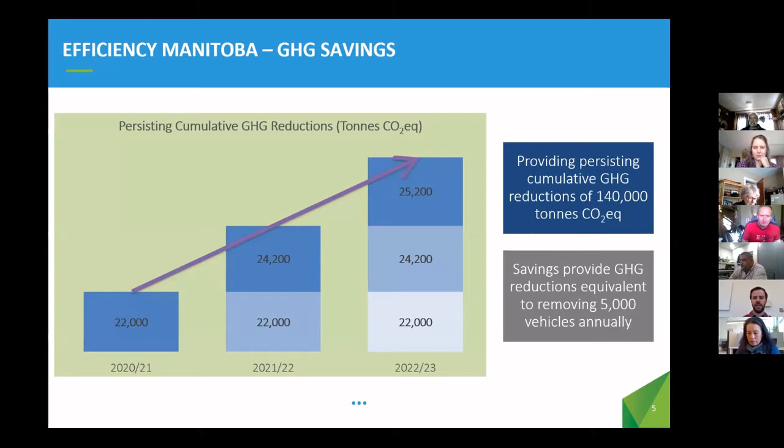Now, we don't have a mandate for electrification or GHG reductions, but as a result of our programs reducing electric consumption and, more significantly, natural gas consumption, we are achieving GHG reductions every year that we operate. You can see those are piling up over the years and are certainly significant.

So now to the project where I was asked to go through, the natural gas challenge, or as I'm calling it, not as flashy a name, but meeting peak electricity demand in winter. The reason I say that is because our natural gas consumption in Manitoba is primarily for water heating, but also, more importantly, space heating.

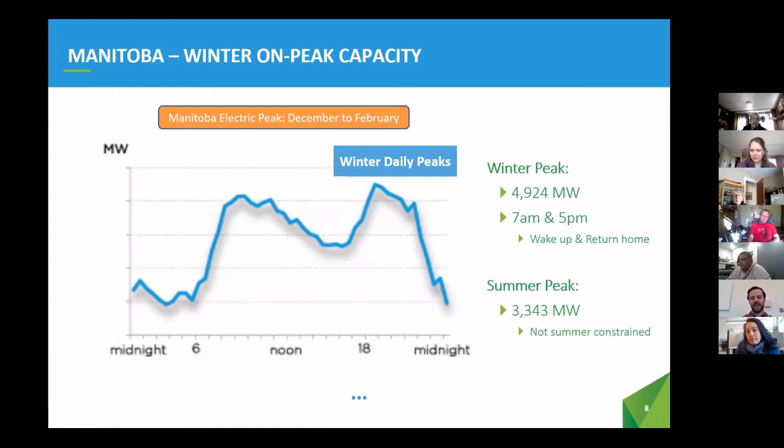Even as it is right now, our peak energy usage in Manitoba happens in the months of December to February, typically on the coldest days of the year. That peak, you can see throughout the day, energy usage adjusts, and it's particularly high in the morning when everybody wakes up, turns on their coffee maker, all the lights, and turns up the thermostat. Then it dips down a bit throughout the day as people hopefully turn off their lights when they leave home and maybe turn down the thermostat. Then it peaks back up when everybody returns home, turns on the lights, starts cooking, and businesses are also still operating around that time. So you see those double peaks that we have.

Of the last 4 record peaks, I believe 3 were at 5 p.m. and 1 was at 7 a.m. So those are the points we need to keep mindful of, because if you're going to reduce or eliminate natural gas usage, which is for heating, those peaks are going to be that much higher.

Just to give an idea, if Manitoba were to fully decarbonize on this front, we're looking at natural gas loads being equivalent to about all of our current electric capacity. So there have been reports out there that said we need to double our electrical capacity in Manitoba.

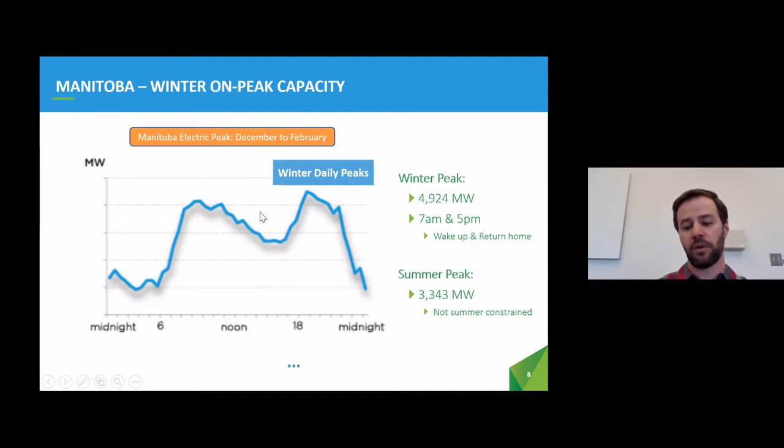Another option is to shift that electric peak usage. As I indicated, if we could shift these peak usages at the morning and evening off to later times, then that would reduce the amount of capacity gains that we would need.

The last option I want to talk about is reducing energy consumption in general, and this is what Efficiency Manitoba does. Now, what option would we need to do? Well, all of these. It's just a variety of the energy mix that we're going to need to achieve this.

Keep in mind that because those are intermittent technologies, you would actually have to add energy storage on top of that, and we need systems that can achieve that peak winter savings. So then you've got hydroelectricity, and obviously there's natural gas combined cycle, but that kind of defeats the purpose here. If we're trying to work towards a road to decarbonization, then adding a natural gas load isn't going to help that.

Now, one that's not on here is actually energy efficiency. Energy efficiency is the least expensive form of new energy. Essentially, it's kind of that concept of a dollar saved, a dollar earned. So if we can reduce our electric usage on that peak, then that's electricity that could be used elsewhere.

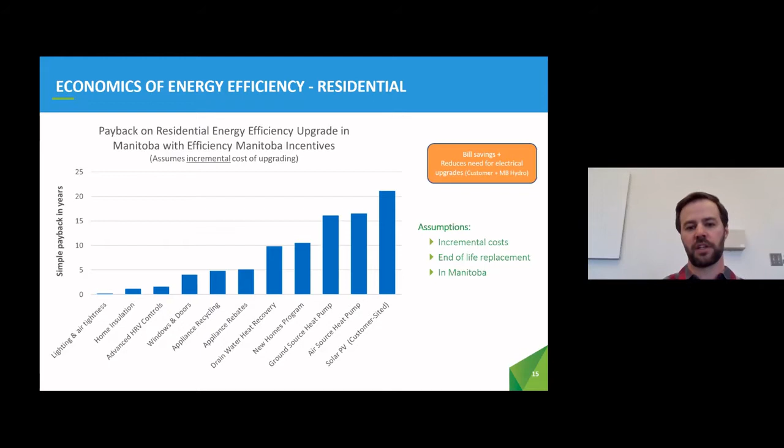Now, these simple payback calculations are based on incremental costs. So I'm not talking about ripping off the siding of a perfectly good building that's 5 years old and upgrading that insulation. It's the point of time when a customer is deciding to upgrade something in their facility - the windows, doors, insulation - and they decide to go with a more energy efficient option. It's the incremental cost, and we have incentives that reduce that incremental cost. That's how you're achieving these phenomenal paybacks in these residential and commercial programs.

And again, you can see here the building envelope is the most cost-effective means as well on the commercial side of things. So I'll get into a couple programs, and I know I'm going to go a little bit quickly on some of these things.

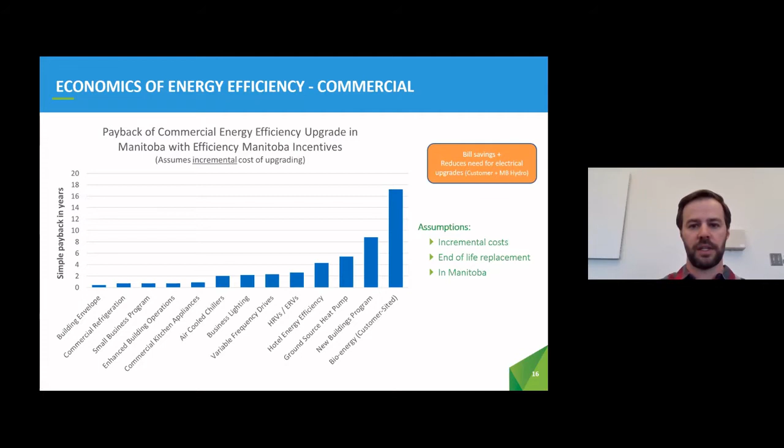Some of these measures could certainly have an hour on each topic, so by all means, you'll have time for questions at the end. But here's one of the ones that certainly has phenomenal paybacks and will give us on-peak energy savings in the winter: lighting, because lighting is going to be operating during those peaks.

And so here we can see, in an actual project example, we had a customer that eliminated their metal halide fixtures and replaced them with LED fixtures. And they actually achieved a payback of 3.3 years.

And the benefits of LEDs, being longer product life and less maintenance and so many more options and flexibility of lighting. With previous forms of lighting, you got the color temperature that you got. Whereas with LED lighting, you can go from warm light to blue light. I've even seen those little party lights that can actually alter and change the light. So there's so much more flexibility in those, and great energy savings.

One of the forms of energy reduction that we really need to talk about, if we're going to make significant inroads in reducing our heating loads and reducing that winter peak usage, is the building envelope. In this example on the right, which I've crossed out, you can see thermal bridging, where the traditional way of insulating buildings was putting insulation in between the studs. So here you can see in this house that there is thermal bridging through the stud, and it's actually warming up the exterior of the house. You see those offsets where the studs are. Now, that's even more significant if you're looking at metal studs, which transfer even more heat.

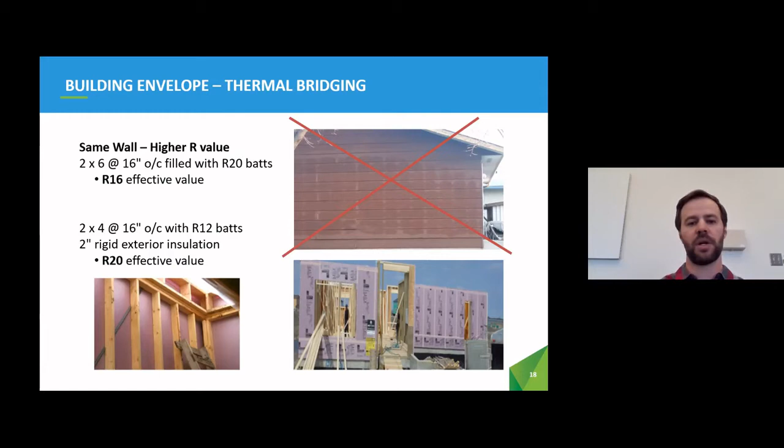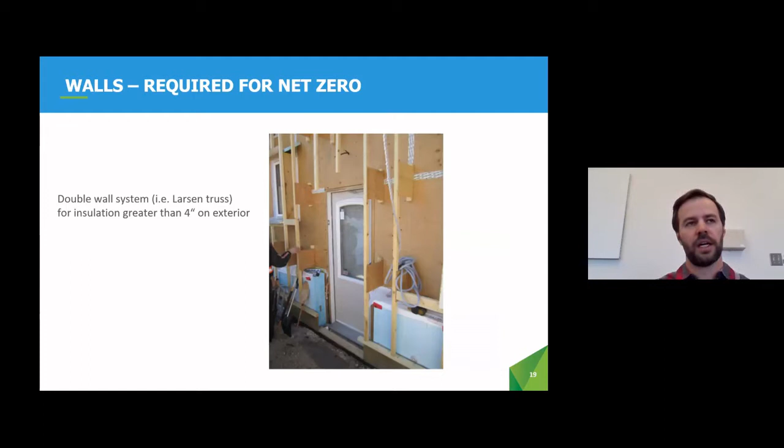Now, if you wanted to go even further, and we're getting into requirements for net zero, if that's the way the legislation is going, then we'll have to go into these double wall systems with Larsen truss, so you have enough room for 4 inches of insulation on the exterior, a very solid break of insulation. And obviously, you're going to need high performance windows as well, and the like.

If you have a standard home that had 4.5 air changes an hour, and you reduce that with just a bit of work to 3.5, which wouldn't be hard to achieve, then it's essentially the equivalent of upgrading your wall insulation from R12 to R18, or increasing your attic insulation from R20 to R60. And you can do these kinds of things with, say, $1,000 or less of work on improving the air sealing around your windows and doors. So it's not insignificant, and the return is huge.

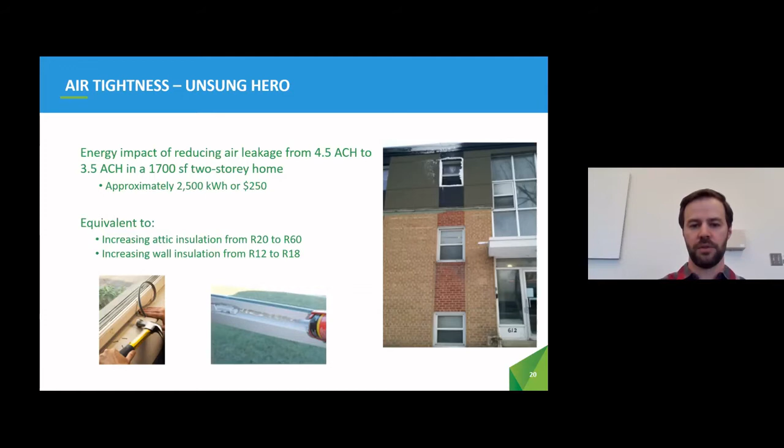Now, getting into the actual heating systems, first I would say the focus should be on reducing the need for the heating system. That should be your primary objective. But once you've reduced your internal heating loads and upgraded your building envelope, then we can look into ground source heat pumps. The reason ground source heat pumps are more efficient than other heating systems is because they're just moving heat versus creating it. The ground in Manitoba is about 5 or 6 degrees. What a ground source heat pump does is, through a ground loop and compression and expansion cycles, amplify that heat and bring it into the building.

And from there, you can achieve a 60% reduction in energy use, or turn 1 kilowatt hour of pumping capacity into 2.5 kilowatt hours of heat. And this will actually achieve on-peak winter savings. So now we're reducing that peak load on our system so we can use that somewhere else, and we don't have to add new costly forms of generation. And Efficiency Manitoba already has commercial incentives available for ground source heat pumps.

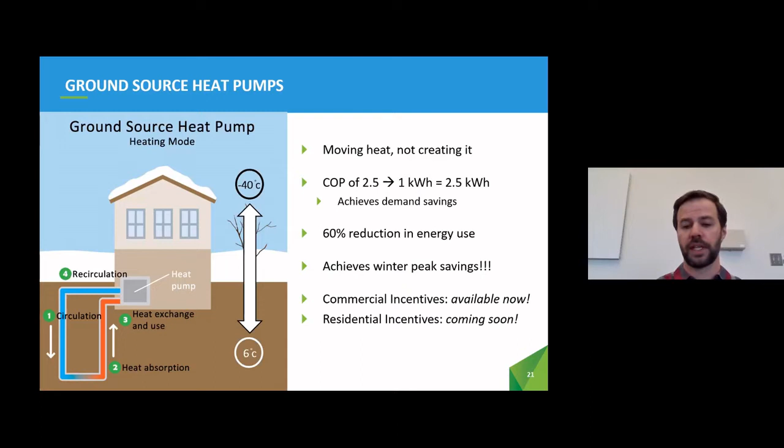And in this year, we'll be rolling out incentives on the residential side as well, which I'm very excited about. But not all ground source heat pump installations are equivalent, and that goes the same for building envelope and air sealing and so forth. You have to take a concerted effort and make energy efficiency a focus of what you're trying to achieve. So as I said, first off, it'd be best to improve the building envelope first, because that reduces the amount of ground source heat pump heating capacity you need, which improves the cost effectiveness of the system.

You need to design systems so that there's balanced heating loads as best as you can. If you're constantly pulling heat out of the ground and returning very little heat in, so you would return heat back in when the heat pump system basically operates in reverse in, say, the summer when you're adding cooling loads, and then you're pulling heat out of your building and putting it back into the ground. So that's when you'd reverse your system. If you don't have a balanced system, then over time you're going to reduce the efficiency of how that system operates.

So the way to avoid that is having a good designer or engineer that has experience in designing these systems, and they can do that through obviously their experience, but also through loop design software that factors in the soil conditions and the configuration of your loop design. You need enough space to be able to install a loop. If you're drilling your holes and installing a loop, and they're 2 feet apart, you're just stealing heat from each other, and the effectiveness of that system is not going to stand the test of time.

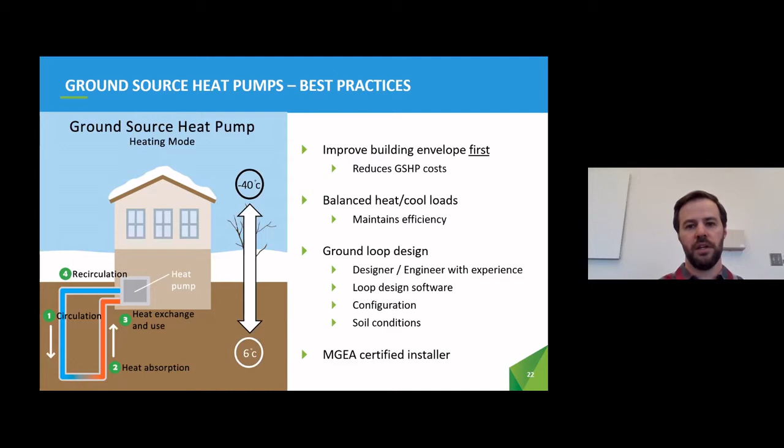Another thing is the installer of the system should be an MGEA certified installer, and that's a requirement for our Efficiency Manitoba incentive programs as well.

Another form of more efficient electric heating is air source heat pumps. Now, again, not all air source heat pumps are created equally. There's a multitude of air source heat pumps that are made for significantly more mild climates. What I'm talking about is what we call a cold climate air source heat pump. Unfortunately, there isn't a standard that defines cold climate air source heat pumps. But they're variable capacity heat pumps that have the ability to operate as low as -25. When you're getting to that cold outdoor temperature, their efficiency certainly declines. They're certainly a lot more energy efficient in the shoulder seasons of spring and fall.

But as I said, our winter peak happens on the typical coldest days of the year, or when you have several really cold days in a row. So these air source heat pumps will provide us more energy savings, but they won't necessarily provide us peak demand savings in the coldest days of the year. But they're certainly a lot better than your basic electric resistance heating system. And they can be used in situations where you just don't have the right soil conditions or space to install a proper ground source heat pump loop. And we'll actually have incentives coming to market for this in 2021.

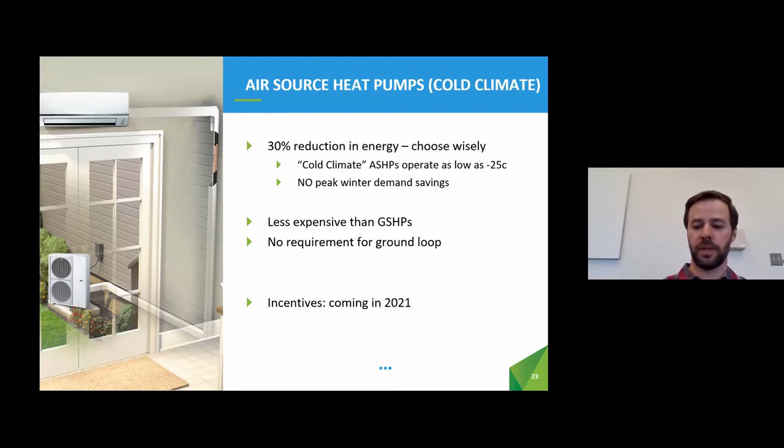I just want to give you an example of the difference in home heating. And I use home heating because with buildings, the heating is so incredibly different based on what the building is used for and what internal loads there are. So I'm referring to home heating because it's a lot more standard, an average home. So here we can see the cost of the various types of residential heating systems based on the energy efficiency of the various electric and gas heating systems.

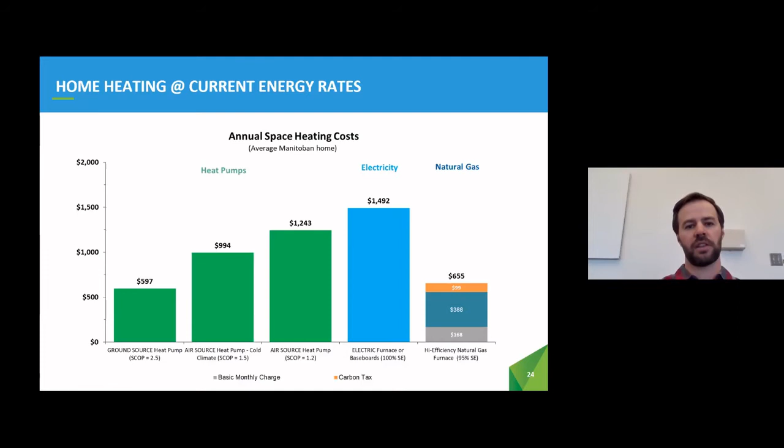So you can see that ground source is already on par in competitiveness with high efficiency natural gas, but you see that air source, the cold climate, and the one in the middle there, which is the non-cold climate system, their cost effectiveness is improving. And if we were to fast forward and basically lock these energy prices at what they are now and install a $170 a ton carbon tax, then you can see what's going to happen over time. Now, certainly over the next 20 years, there's going to be inflation, one would presume, in the cost of electricity.

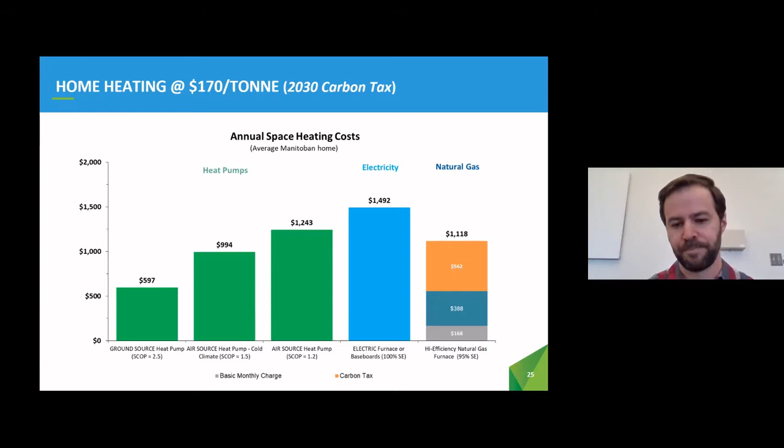Now, in order for natural gas heating and basic electric resistance heating to be on par on price, the carbon tax based on current energy rates would need to be about $280 a ton. So just something to keep in mind, keep that in perspective.

Another thing I want to talk about is ventilation air heating. Basically any commercial building, and homes also, need ventilation air heating. You need to bring in fresh air. You can't just close a box around a building and not bring in fresh air. So that's obvious, right? You could put a meter of insulation around a building and you won't eliminate your need for bringing in fresh air. And again, the peak cost of bringing in that fresh air occurs in the dead of winter.

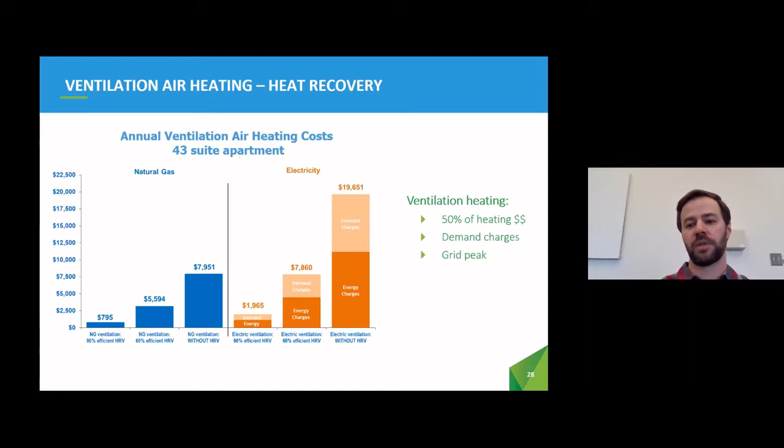Ventilation air heating can account for 50% of a commercial building's energy bill. So I want to talk about how you can reduce that cost and how you can future-proof your building. And that's by installing a more efficient HRV. First off, installing heat recovery ventilation, but installing a more efficient heat recovery ventilator is the key.

There's a couple types of heat recovery ventilators right now. There's the plate heat exchanger, which is a fixed system where the cold air and the hot air pass beside each other, but there's no movement in the heat core, energy core. These systems are good, but they're not ideal for Manitoba.

We have some pretty extreme temperatures here, and there's research that indicates that in the depths of our cold, these plate heat exchangers will frost up about half the time in the dead of winter, which is when you presumably want them the most, and when they could actually achieve that capacity savings. So they have to spend some time in defrost mode to unfreeze.

There are more efficient heat recovery ventilators that are able to achieve efficiencies up to 90%. There's actually two manufacturers in Manitoba that produce these more advanced heat recovery ventilators. They're certainly a more costly product, but they work in the depths of our winter and they don't freeze up. The way they achieve this is they have a set of louvers where the cold air stream and the hot air stream pass, and it switches about every minute. It does this enough that they don't frost up and you're able to achieve significant energy savings.

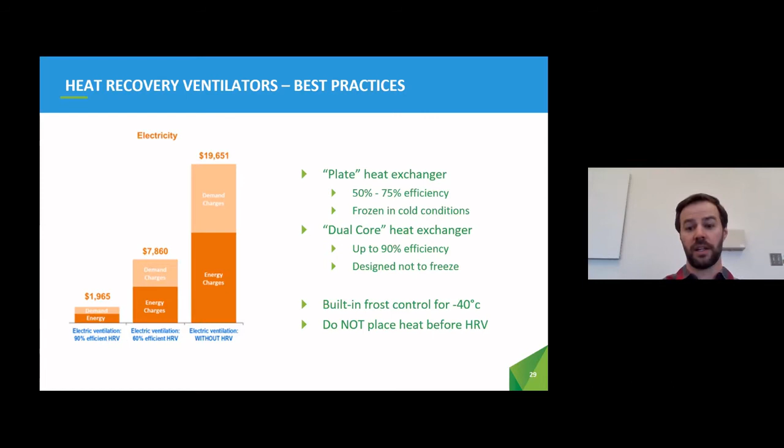Now, I want to talk about energy efficiency in action. We have a great opportunity. There's a lot of buildings that were built in Manitoba in the 70s and 80s, and they're coming time for renovation. We need to seize this opportunity to improve energy efficiency for many years to come, because with these renovation choices, when somebody's recladding a building or changing the exterior, it doesn't cost much more to add insulation, and that exterior can last for 40 years or more, depending on what's chosen.

So we don't want to lock ourselves into poor energy performance by not taking the opportunity to upgrade. And with the incentives that we have, the cost of insulation isn't that significant. So it's a great opportunity to do that.

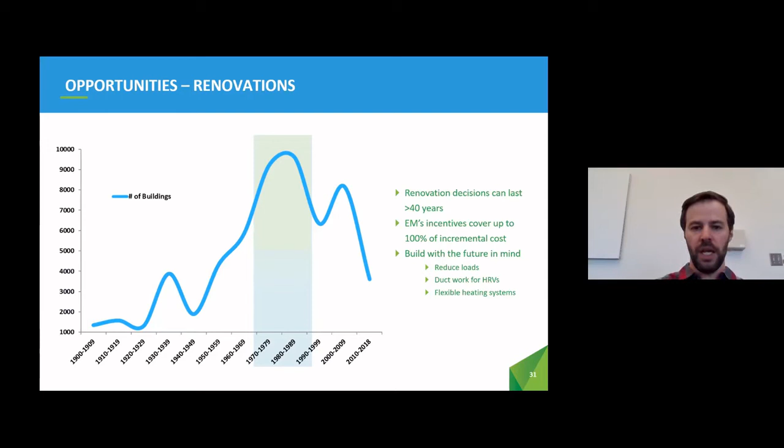One of the buildings I wanted to talk about is a perfect example. It's a personal care home in Minnedosa. This is a care home that was built in 1973. It's heated with the most basic electric heat, baseboards. Its ventilation air was heated with natural gas. And they renovated this building in 2017.

And they achieved a 50% reduction in energy use. And I believe there was a 50 kilowatt reduction, or kVA reduction, in their winter peak demand in this project.

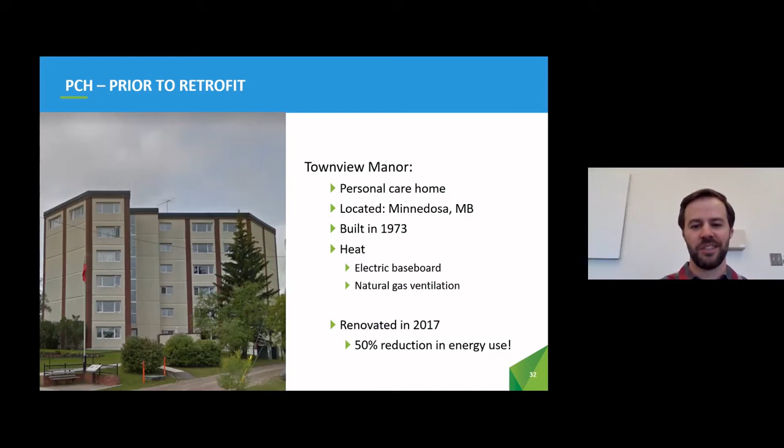What they did was improvements to the envelope, the ventilation, heat recovery, and lighting. They did exterior spray foam insulation, then redid the cladding and exterior on top of that. They actually upgraded the insulation from the interior as well.

They went from basic windows to triple pane fiberglass windows with low E coatings. Oddly enough, they actually increased the windows - there weren't windows on this side and the two sides of the building. So they actually increased the amount of glazing, which typically isn't a great form of insulation like a wall full of insulation would be, but they achieved this energy savings while actually increasing the amount of windows.

And they upgraded the doors, and they did air sealing upgrades. They had done the renovation, closed up the building, did their air sealing test, and realized that it wasn't as good as they wanted, so they went back and did it. I can't speak enough to that kind of testing and energy modeling to see what kind of ways you can achieve the energy savings.

And the air sealing they did was the equivalent of closing a 2 square foot hole in the side of the building.

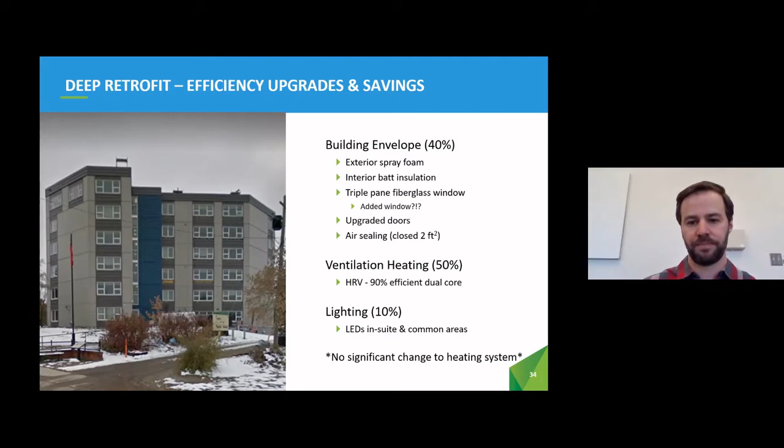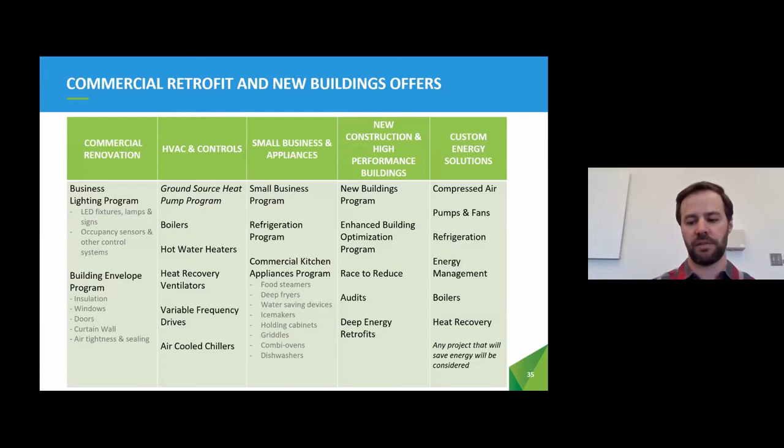We have a significant amount of commercial retrofit and new building offers, and our new building offers looks at energy modeling, and that's definitely a route to go when you're looking at new builds, or commercial and residential.

And then one other thing I want to talk about is Efficiency Manitoba's innovation fund. So part of our new energy efficiency plan has set aside funds for our innovation strategy, where we have $700,000 annually to support pilot projects or applied research with the aim of reducing barriers to adoption of technologies in Manitoba.

So there's a lot of technology, a lot of strategies, I suppose, that could be applied in Manitoba, but maybe there isn't enough research or work being done because we have a more extreme climate. We don't necessarily have the same volume, and people aren't trying to solve all the problems that are happening in California or Vermont, or places that have certainly more population than us.

So this is a really great fund, and this will be coming out this year, where we'll be accepting applications for the innovation fund. And I'm very much looking forward to that fund, and to seeing what kind of innovative things Manitobans want to apply research for.